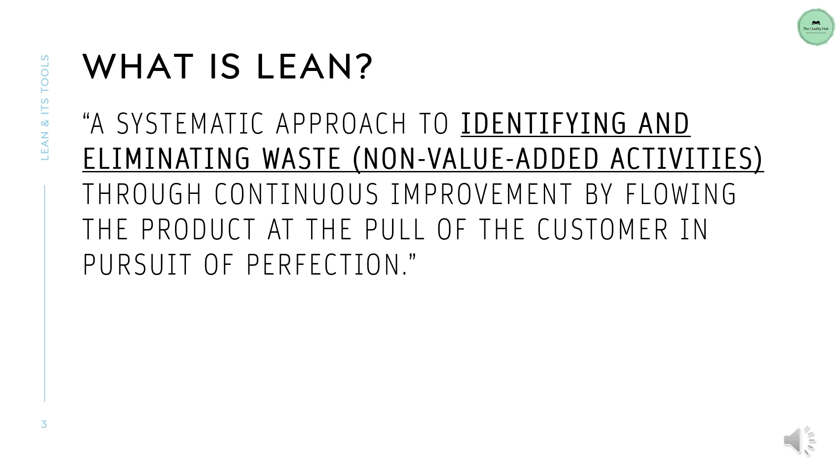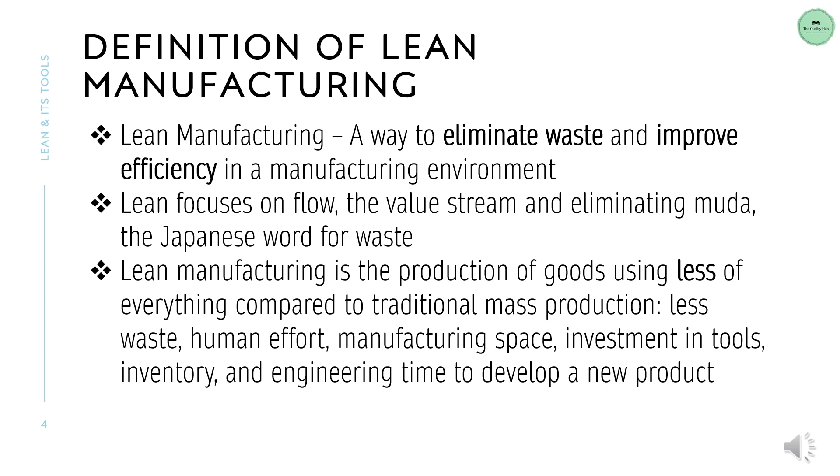Lean manufacturing, a way to eliminate waste and improve efficiency in a manufacturing environment. Lean focuses on flow, the value stream, and eliminating MUDA, the Japanese word for waste. Lean manufacturing is the production of goods using less of everything compared to traditional mass production: less waste, human effort, manufacturing space, investment in tools, inventory, and engineering time to develop a new product.

Lean manufacturing is sometimes called the Toyota Production System, TPS, because Toyota Motor Company's Eiji Toyoda and Taiichi Ohno are given credit for its approach and innovations.

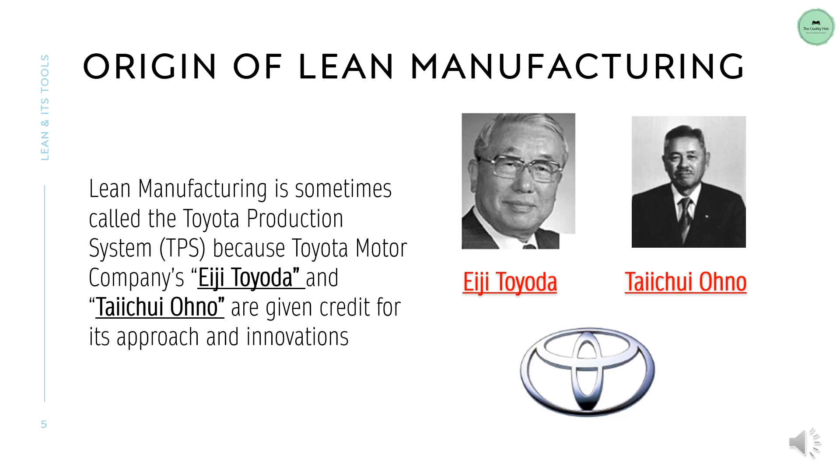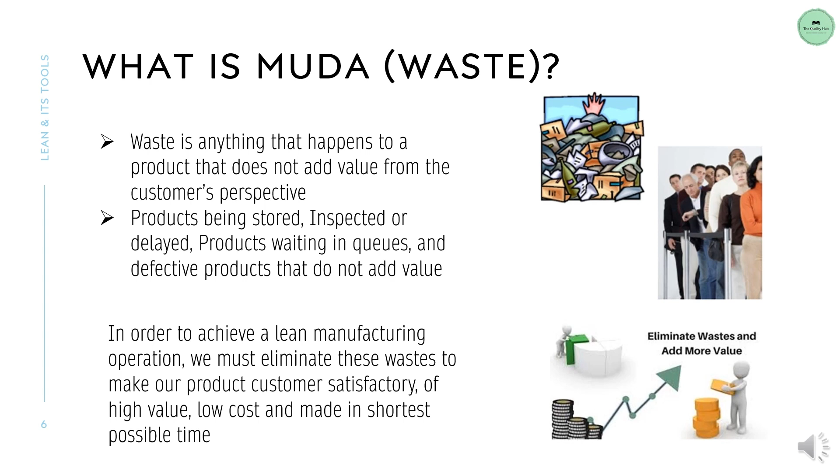Waste is anything that happens to a product that does not add value from the customer's perspective. Products being stored, inspected or delayed, products waiting in queues, and defective products do not add value. In order to achieve a lean manufacturing operation, we must eliminate these wastes to make our product customer satisfactory, of high value, low cost, and made in the shortest possible time.

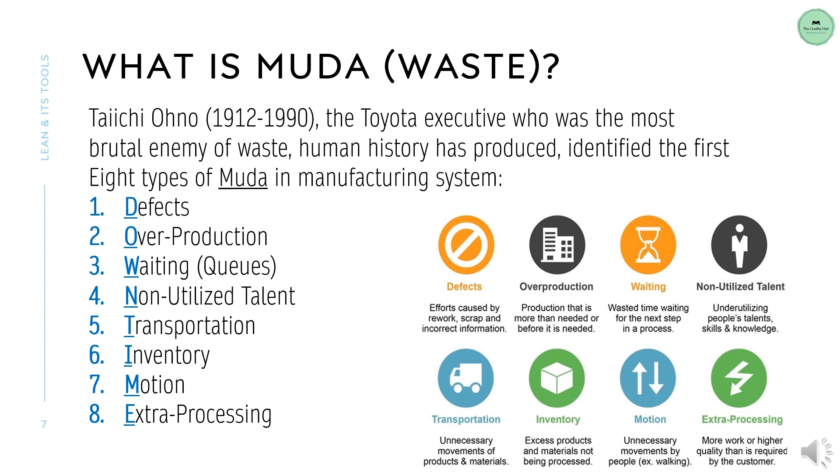Taiichi Ohno, 1912 to 1990, the Toyota executive who was the most brutal enemy of waste human history has produced, identified the first 8 types of MUDA in manufacturing systems: 1. Defects. 2. Overproduction. 3. Waiting, queues. 4. Non-utilized talent. 5. Transportation. 6. Inventory. 7. Motion. 8. Extra processing.

1. Defects, products or services that are out of specification that require resources to correct. 2. Overproduction, producing more than the customer orders or producing early. Inventory of any kind is usually waste. 3. Waiting, idle time, storage, and waiting are wastes. 4. Non-utilized talent, employees that are not effectively engaged in the process.

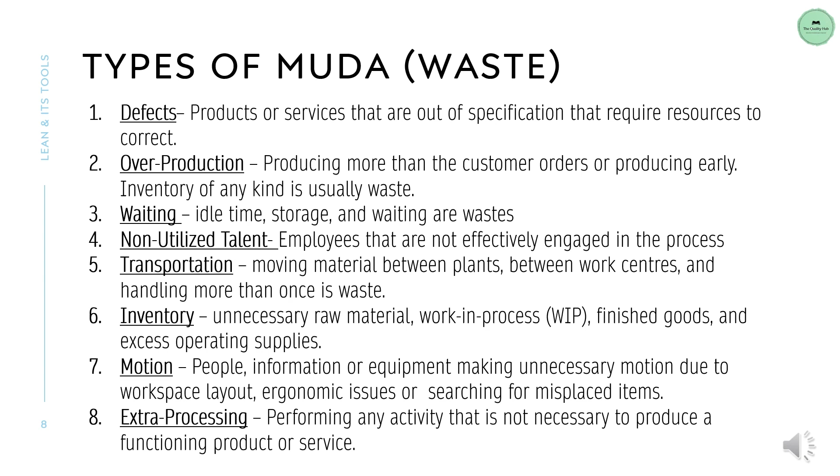5. Transportation, moving material between plants, between work centers, and handling more than once is waste. 6. Inventory, unnecessary raw material, work in process, WIP, finished goods, and excess operating supplies. 7. Motion, people, information or equipment making unnecessary motion due to workspace layout, ergonomic issues or searching for misplaced items. 8. Extra processing, performing any activity that is not necessary to produce a functioning product or service.

Hoshin Kanri is a 7-step process used as part of strategic planning, in which goals are communicated and shared throughout the company, and then put into action. The purpose of Hoshin Planning is to improve communications throughout the company, whilst also reducing the waste created by poor direction or bad management at any level. For this reason, companies that use Hoshin Kanri often follow a think, plan, implement, and review process.

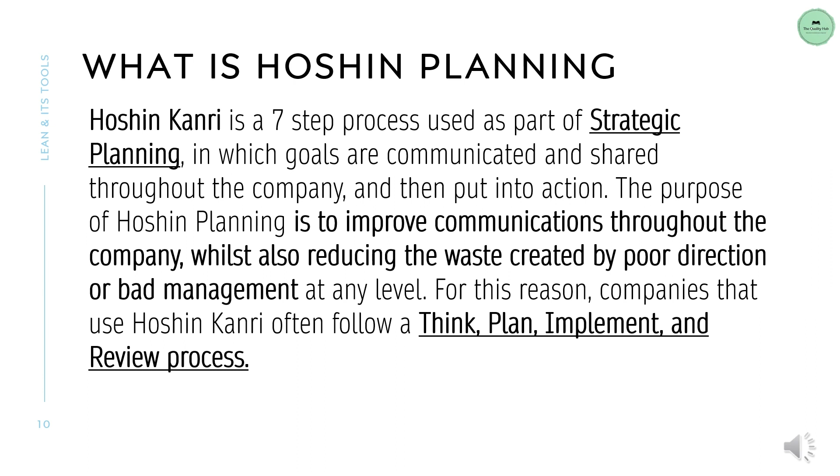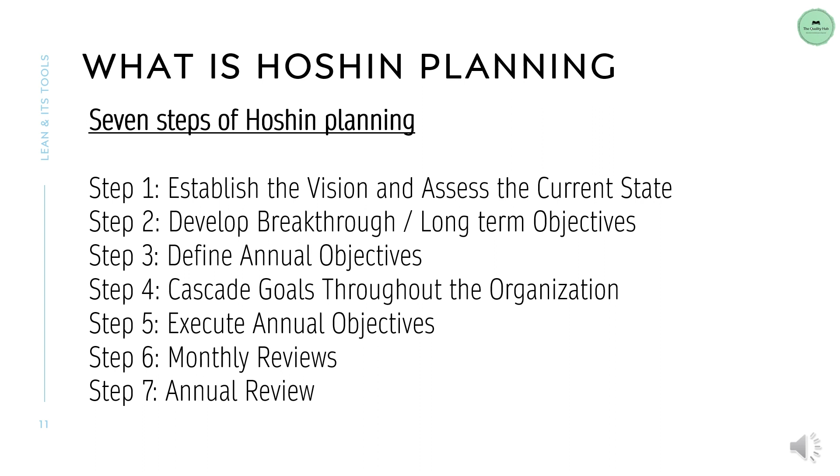Step 1. Establish the vision and assess the current state. Step 2. Develop breakthrough/long-term objectives. Step 3. Define annual objectives. Step 4. Cascade goals throughout the organization.

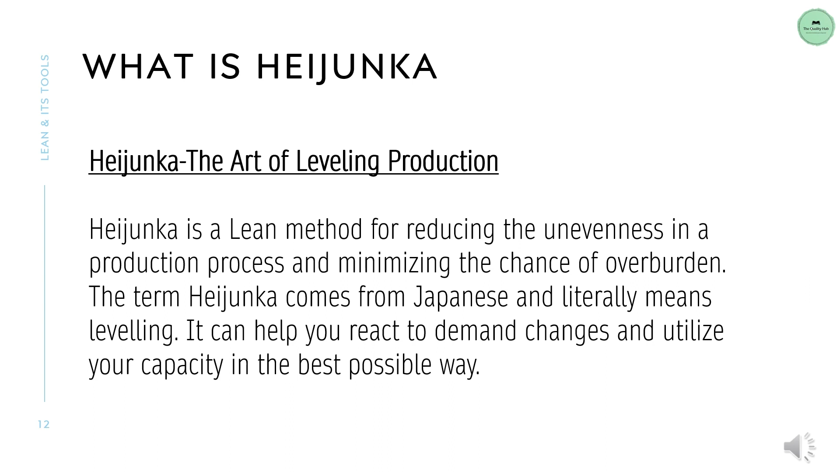HEIJUNKA, the art of leveling production. HEIJUNKA is a lean method for reducing the unevenness in a production process and minimizing the chance of overburden. The term HEIJUNKA comes from Japanese and literally means leveling. It can help you react to demand changes and utilize your capacity in the best possible way.

JIDOKA is a lean method that is widely adopted in manufacturing and product development. Also known as autonomation, it is a simple way of protecting your company from delivering products of low quality or defects to your customers while trying to keep up your takt time. The JIDOKA system consists of certain common autonomation systems like Poka-yoke and the ANDON System.

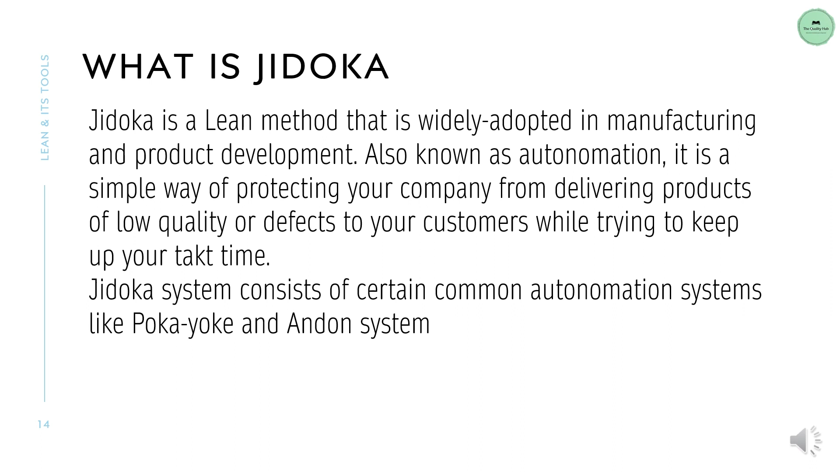The ANDON System serves as a warning system to signal and identify problems in the process. A visual and/or audible communication system that notifies everyone of abnormalities in a process when support or attention is needed. This can be triggered automatically or manually by a machine or person.

It could be a cord that is manually pulled, often seen on an assembly line. Light, red, yellow and green colors. Flag, also red, yellow and green, that is placed in a holder or flipped to signal a problem.

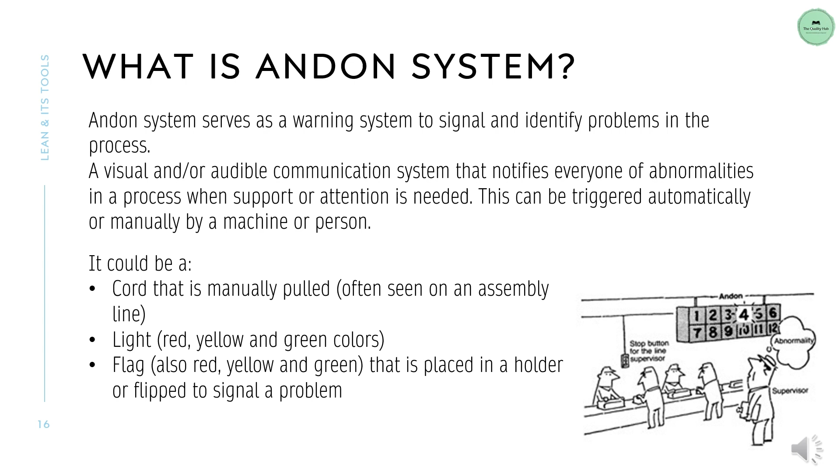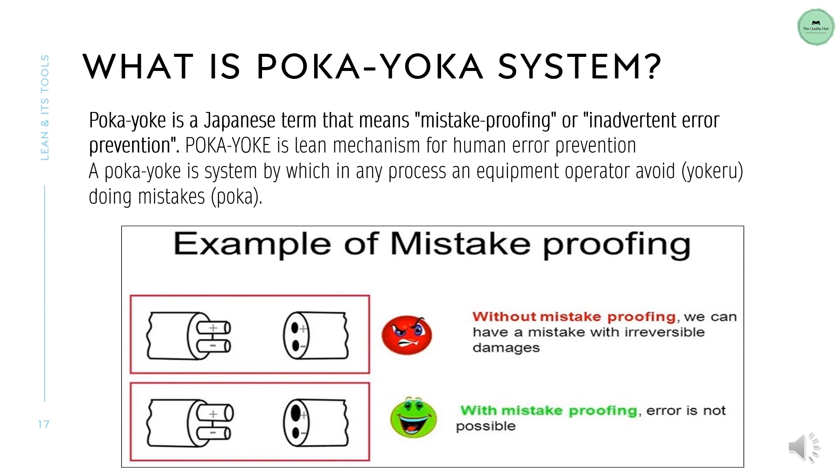Poka-yoke is a Japanese term that means mistake proofing or inadvertent error prevention. Poka-yoke is a lean mechanism for human error prevention. A poka-yoke is a system by which, in any process, an equipment operator avoids (yokeru) making mistakes (poka).

1. Value: specify and define value of the product from the customer's point of view. 2. Value stream: identify all the steps in the value stream for each product family, eliminating whenever possible those steps that do not create value. 3. Flow: make the value-creating steps occur in tight sequence so the product will flow smoothly toward the customer. 4. Pull: make only what is needed by the customer, short-term response to customer rate of demand. 5. Perfection: strive for perfection by continuous improvement.

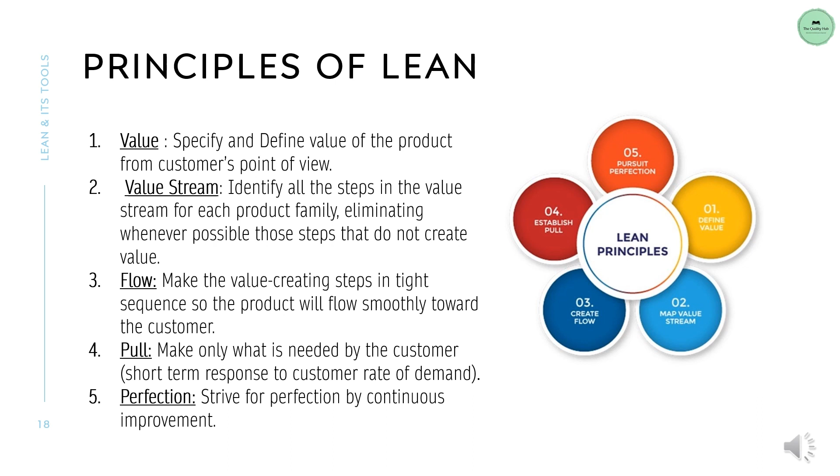5S. Single-minute exchange of dies, SMED. JIT, just-in-time. Kanban. Cellular manufacturing. Standardized work. Total productive maintenance.

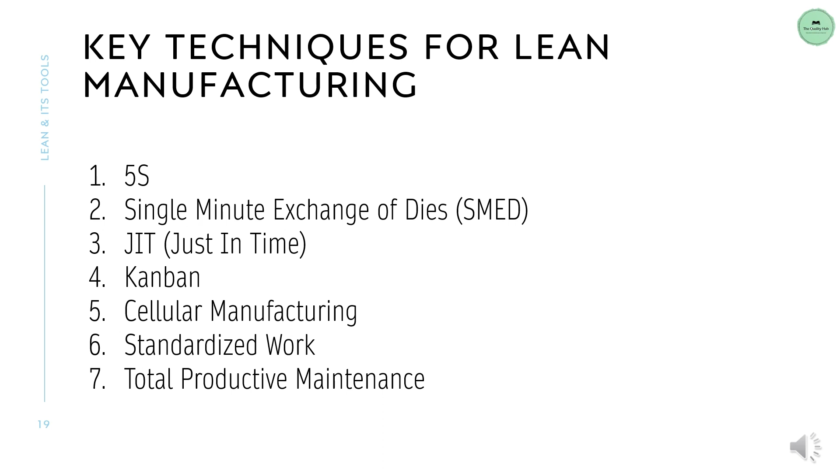5S stands for Sort, Seiri: to separate needed tools, parts, and instructions from unneeded materials and to remove the unneeded ones. Set in order, Seiton: to neatly arrange and identify parts and tools for ease of use. Shine, Seiso: to conduct a cleanup campaign. Standardize, Seiketsu: to conduct Seiri, Seiton, and Seiso daily to maintain a workplace in perfect condition. Sustain/self-discipline, Shitsuke: to form the habit of always following the first 4 S's. In some quarters, 5S has become 6S, the sixth element being safety.

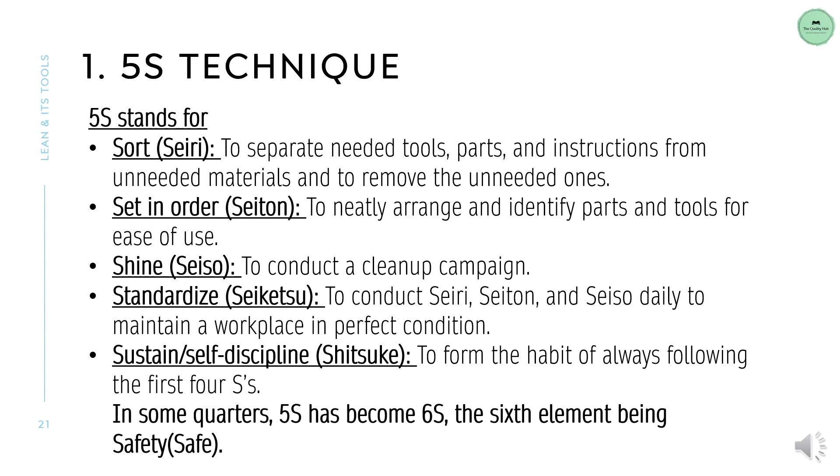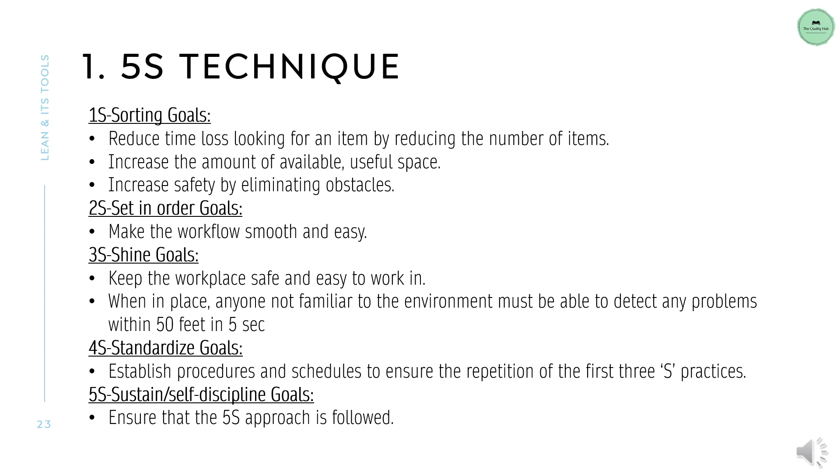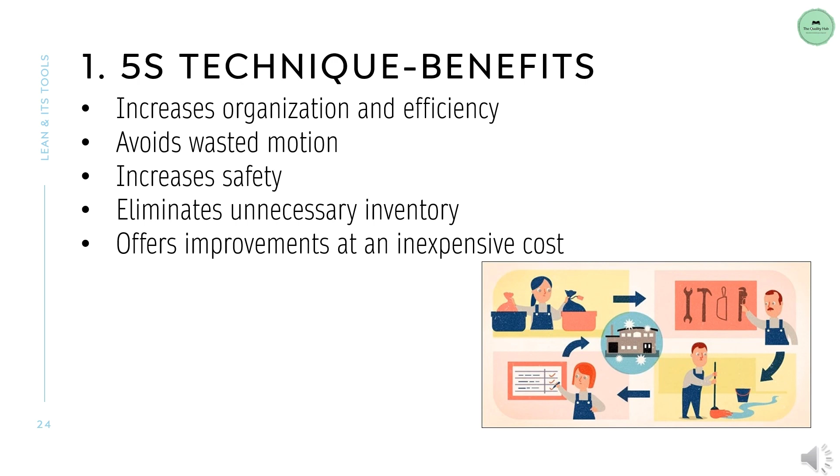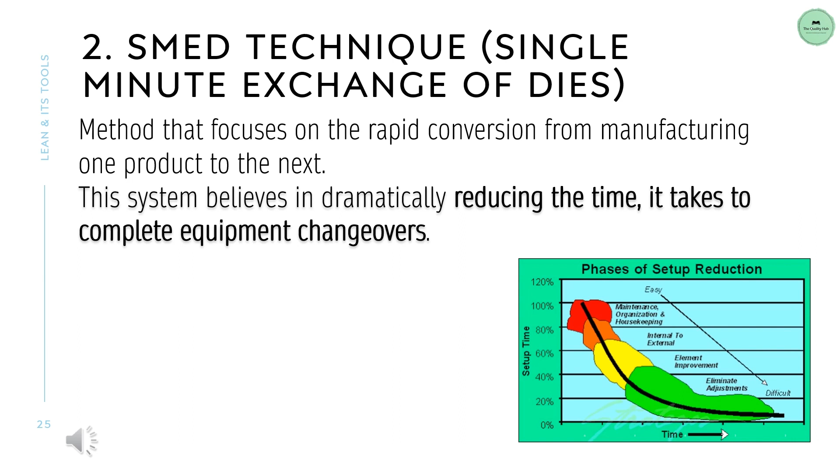Increases organization and efficiency. Avoids wasted motion. Increases safety. Eliminates unnecessary inventory. Offers improvements at an inexpensive cost. SMED is a method that focuses on the rapid conversion from manufacturing one product to the next. This system believes in dramatically reducing the time it takes to complete equipment changeovers.

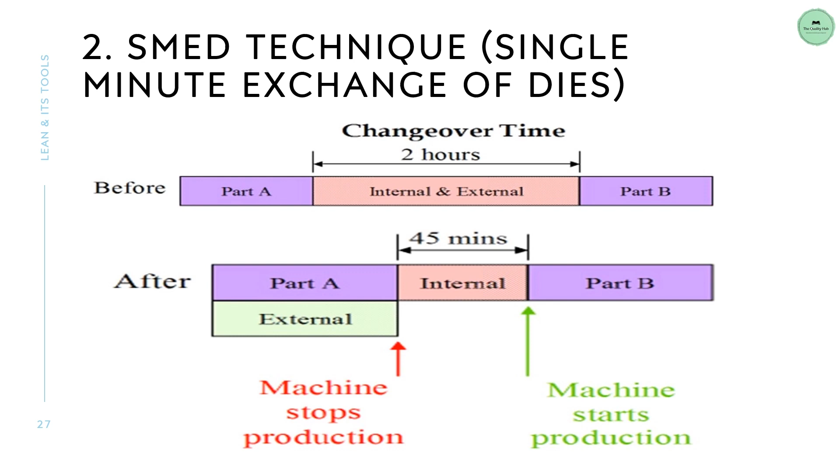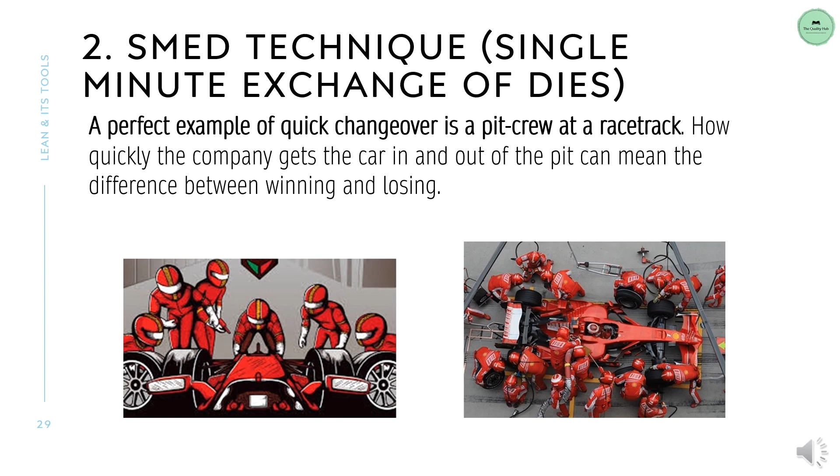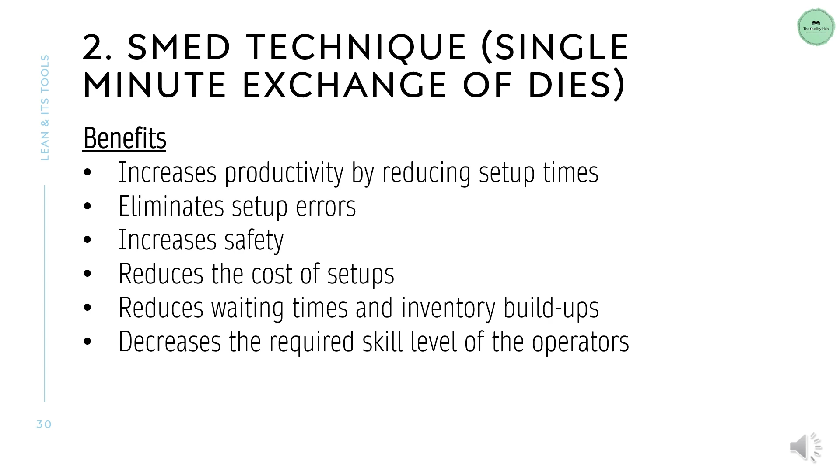A perfect example of quick changeover is a pit crew at a racetrack. How quickly the crew gets the car in and out of the pit can mean the difference between winning and losing. Benefits: increases productivity by reducing setup times. Eliminates setup errors. Increases safety. Reduces the cost of setups. Reduces waiting times and inventory buildups. Decreases the required skill level of the operators.

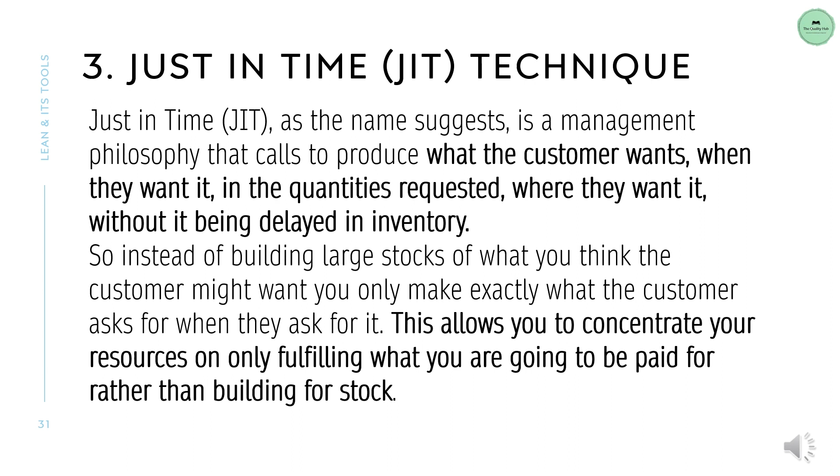Just-in-time, JIT, as the name suggests, is a management philosophy that calls to produce what the customer wants, when they want it, in the quantities requested, where they want it, without it being delayed in inventory. So, instead of building large stocks of what you think the customer might want, you only make exactly what the customer asks for when they ask for it. This allows you to concentrate your resources on only fulfilling what you are going to be paid for rather than building for stock.

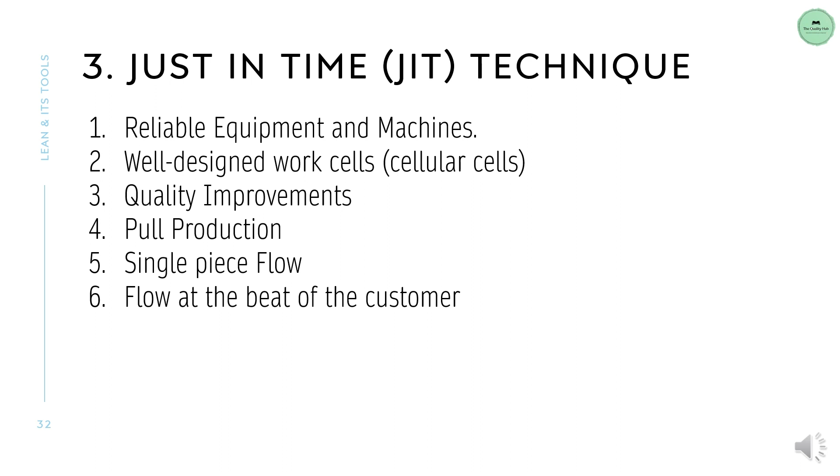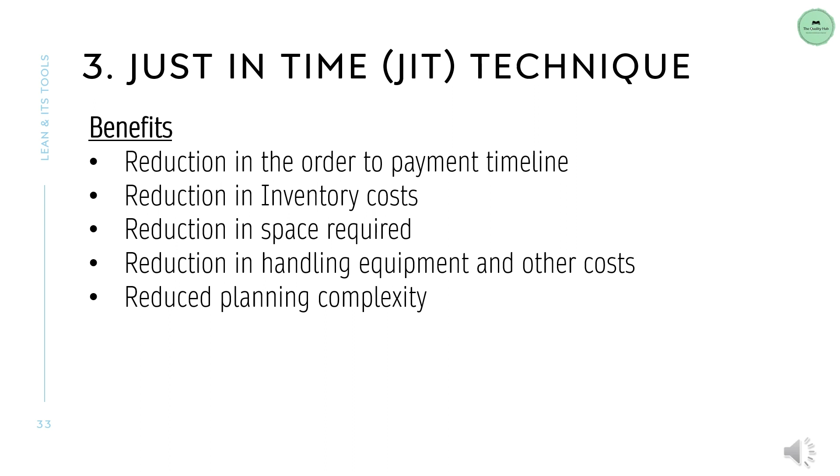Reliable equipment and machines. Well-designed work cells. Quality improvements. Pull production. Single-piece flow. Flow at the beat of the customer. Benefits: reduction in the order-to-payment timeline. Reduction in inventory costs. Reduction in space required. Reduction in handling equipment and other costs. Reduced planning complexity.

Kanban is a system that uses replenishment signals to simplify inventory management. Signals, usually cards, hold product details: what to make, when to make it, how much to make, and where to send it. Cards stay attached to a bin that holds the product. When a bin is empty, it is returned to the start of the assembly line for replenishment. Full bins are returned to the customer, and the cycle continues.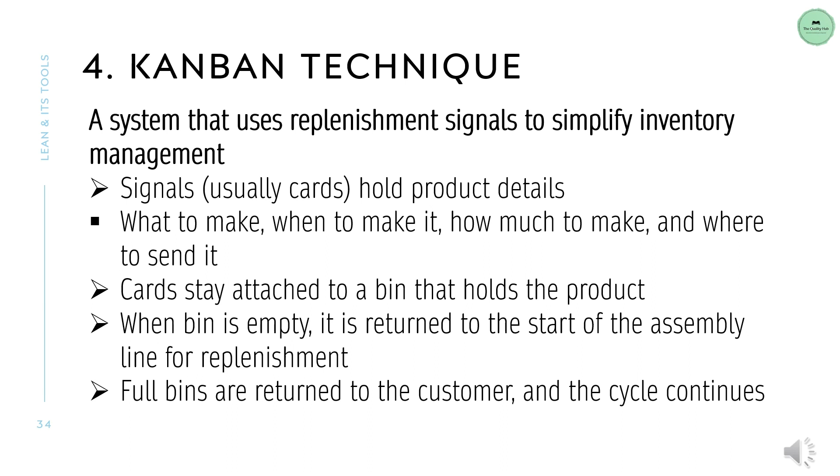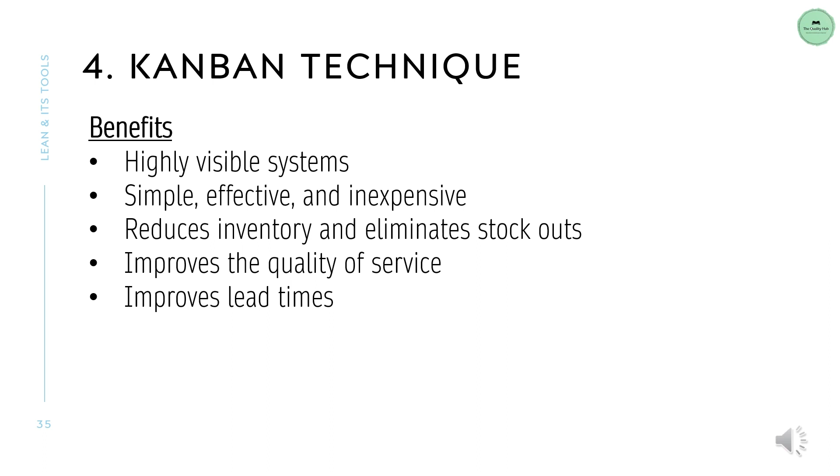Benefits: highly visible systems. Simple, effective, and inexpensive. Reduces inventory and eliminates stockouts. Improves the quality of service. Improves lead times.

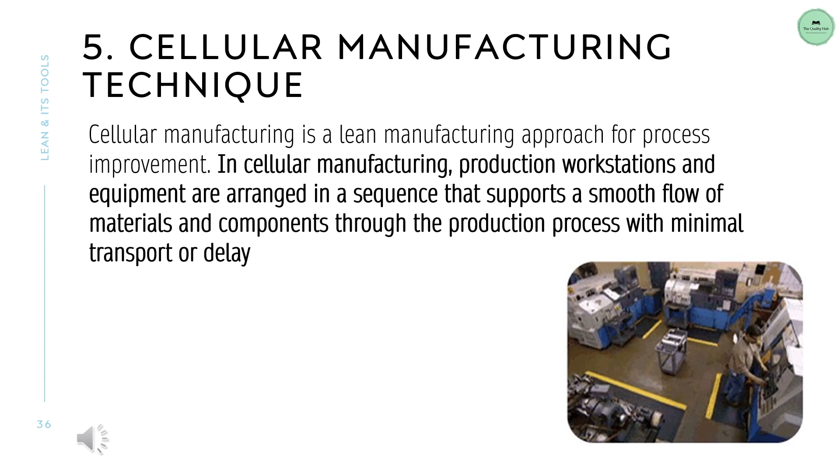Cellular manufacturing is a lean manufacturing approach for process improvement. In cellular manufacturing, production workstations and equipment are arranged in a sequence that supports a smooth flow of materials and components through the production process with minimal transport or delay. Benefits: simplifies material flow and management. Reduces interdepartmental travel. Reduces throughput time. Reduces lot sizes. Simplifies scheduling.

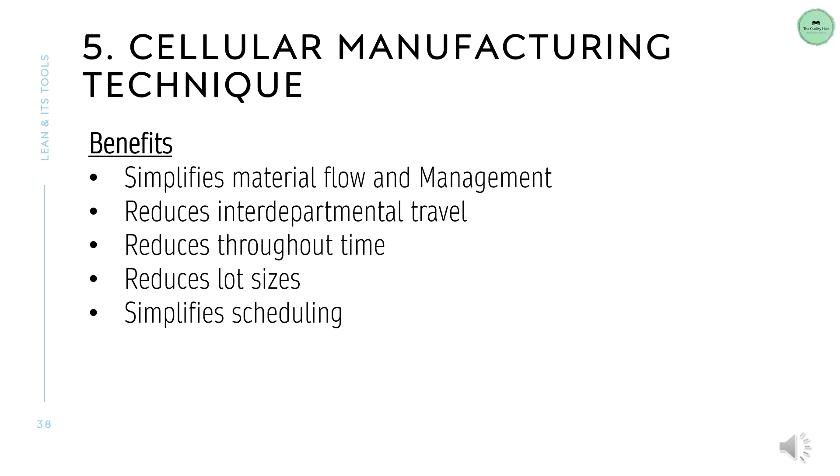Standardized work is a simple concept. It refers to the process of documenting methods, processes, materials, tools, processing times, and more. At its core, it is about ensuring your operations run as smoothly as possible and your process improvement strategy is constantly evolving and being adopted by your employees.

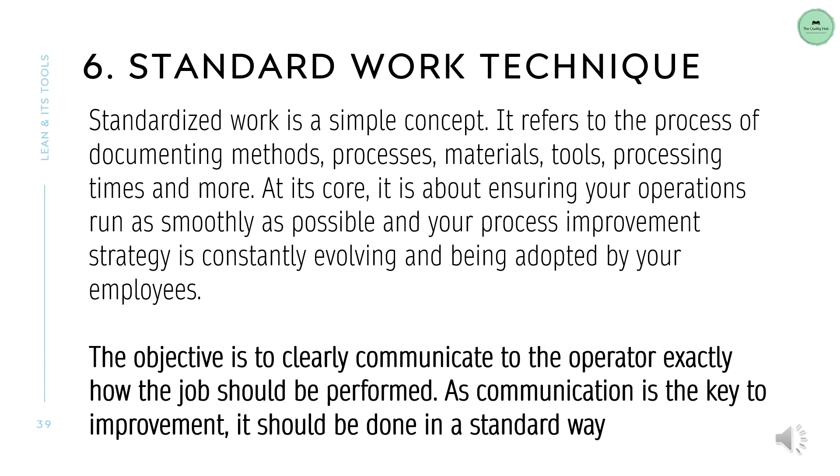The objective is to clearly communicate to the operator exactly how the job should be performed. As communication is the key to improvement, it should be done in a standard way. Benefits: best practices are followed. Process improvement never ends. Reduces waste. Improves scaling efforts. Makes abnormalities more visible. Less time spent on guesswork.

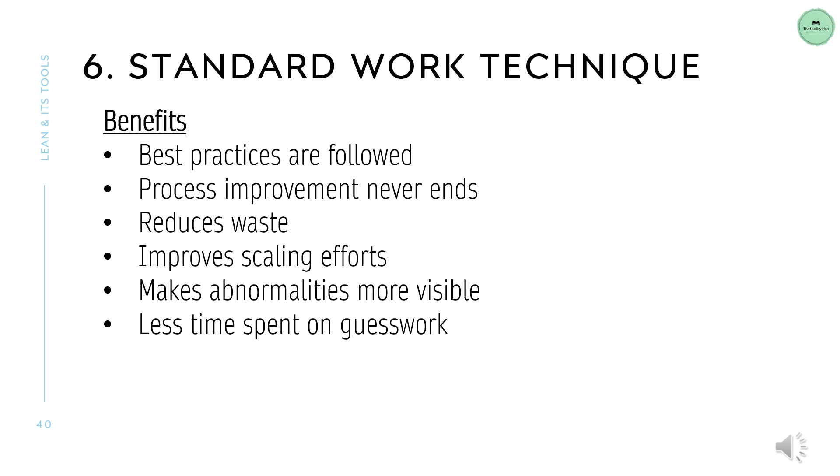TPM, Total Productive Maintenance, is a holistic approach to equipment maintenance that strives to achieve perfect production. TPM emphasizes proactive and preventative maintenance to maximize the operational efficiency of equipment. In the right environment, this can be very effective in improving productivity, increasing uptime, reducing cycle times, and eliminating defects.

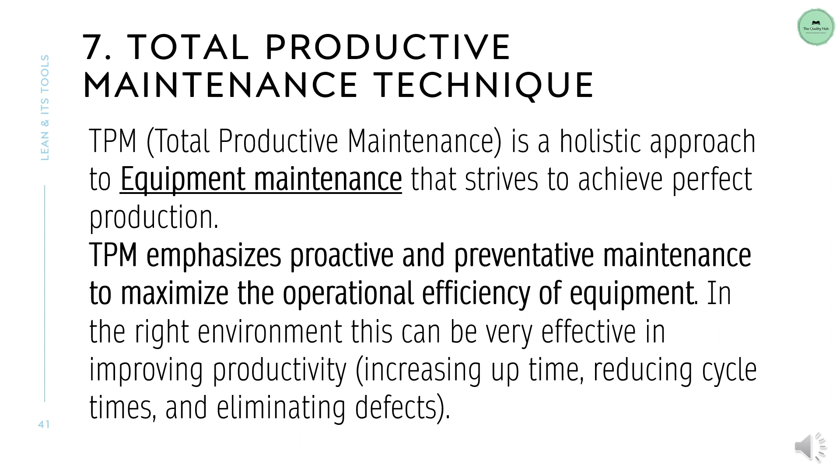Benefits: no major breakdowns. No unplanned downtime. No small stops or slow running. No defects. In addition, it values a safe working environment, no accidents.

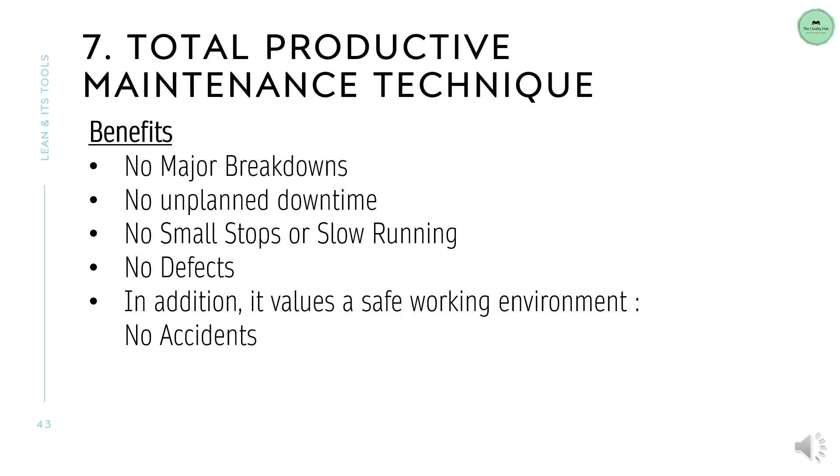1. Greater productivity. Applying a lean methodology involves eliminating tasks that add no value to the customer, referred to as waste. Removing these from processes drives productivity as it means the workforce only engages in activities that benefit the customer. 2. Smoother operations. Once non-value-adding activities, waste, have been removed from processes, the focus is on making the remaining value-adding steps flow smoothly with no interruptions, delays, or bottlenecks.

3. Greater flexibility and responsiveness. With more streamlined processes, you will be better able to meet demands at the pull of the customer. 4. Eliminates defects. Much of the activity involved in a lean methodology is geared towards eliminating defects so that products are made right first time, every time. 5. Improved product quality. Lean tools like error proofing and ANDON strengthen the process and prevent recurrence of the problem. As a result, the quality of your product is improved.

6. Reduce lead time. Applying a lean methodology and removing non-value-adding steps, you'll reduce lead times and be better able to meet demands. 7. Increased customer satisfaction. This is what lean is all about, maintaining happy customers. By removing waste and streamlining processes, you can deliver exactly what the customer wants, when they want it.

8. Improved staff morale. Lean creates an environment where they can raise ideas for improvements and contribute towards better ways of working. Engaging them in this process results in increased staff satisfaction and retention. Staff feel more motivated, more confident of their role in the bigger picture, and more fulfilled. 9. Safer working environment. Employees benefit from a safer working environment where risks have been reduced via 5S and TPM, leading to a safer environment.

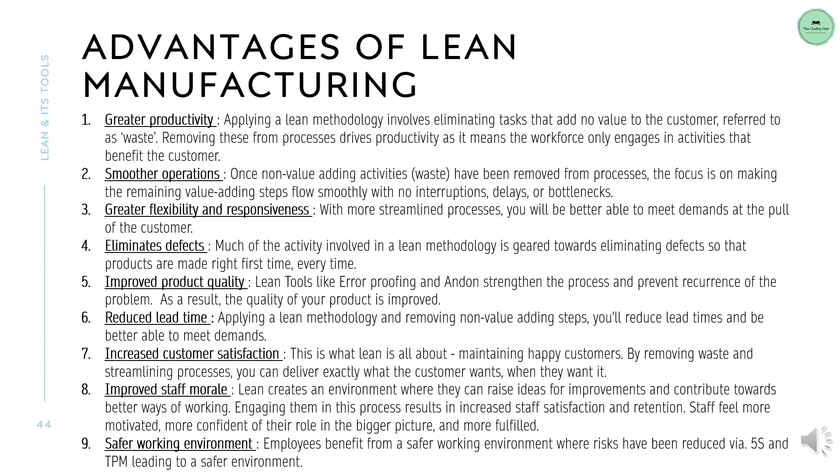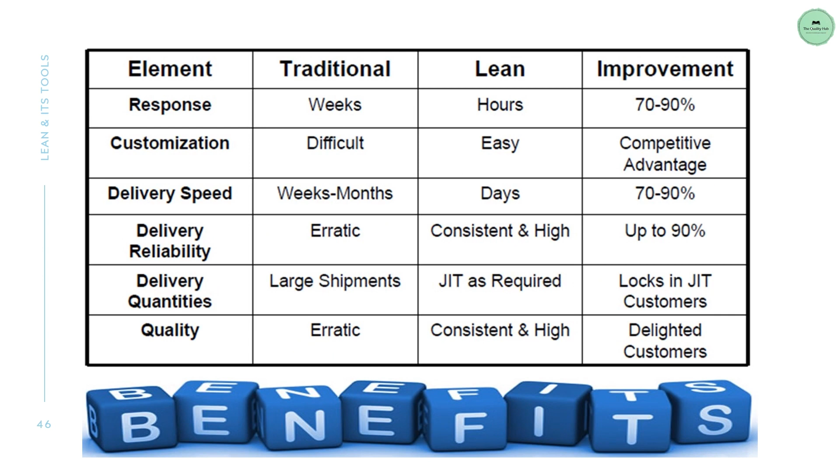As we all came across the basics of lean manufacturing, its tools and their benefits, we will further investigate one of the case studies we came across during our research. This case study is related to one of India's leading footwear manufacturers. Even though being the market leader in footwear manufacturing, they were facing certain major problems in their plant as follows: lower productivity, less space, untidy workspace, mix-up of materials, delay in customer delivery.

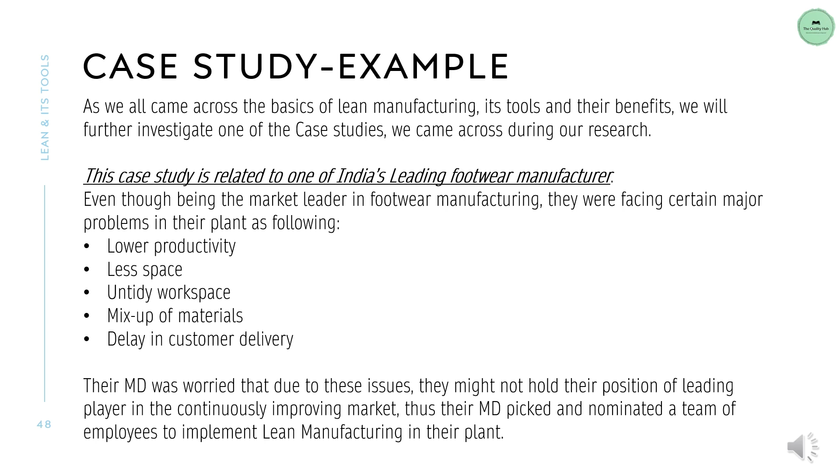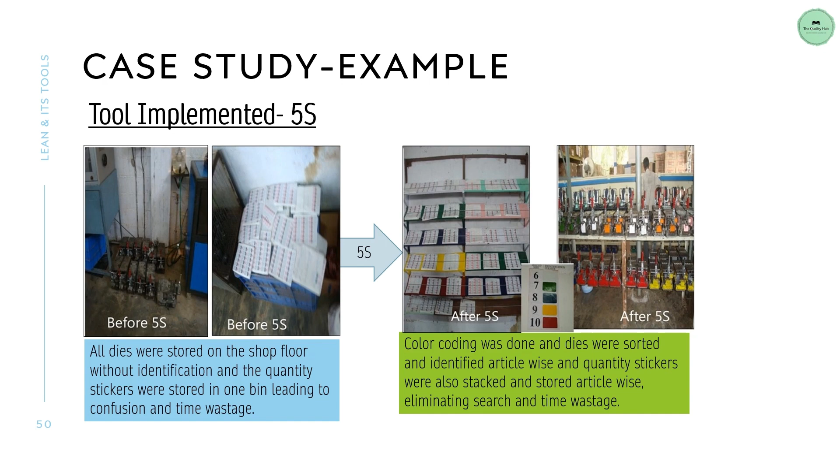Their MD was worried that due to these issues, they might not hold their position of leading player in the continuously improving market. Thus their MD picked and nominated a team of employees to implement lean manufacturing in their plant. All the lean activities were implemented successfully and the following benefits were observed in the company. Production average was 900 pairs/day, but after lean implementation it increased to 1,200 pairs/day.

Finishing activity was utilizing more time during delivery, but after lean all items were processed till final packing, leading to saving of time during delivery. Shop floor was well maintained and organized. Machine health condition was well maintained and total downtime decreased. Employees' morale was increased as there were fewer problems and a well-organized environment to work in. Thus, lean manufacturing helped the company tackle their various problems and improve their overall quality, productivity and employees' morale to keep striving for more improvement in the company.

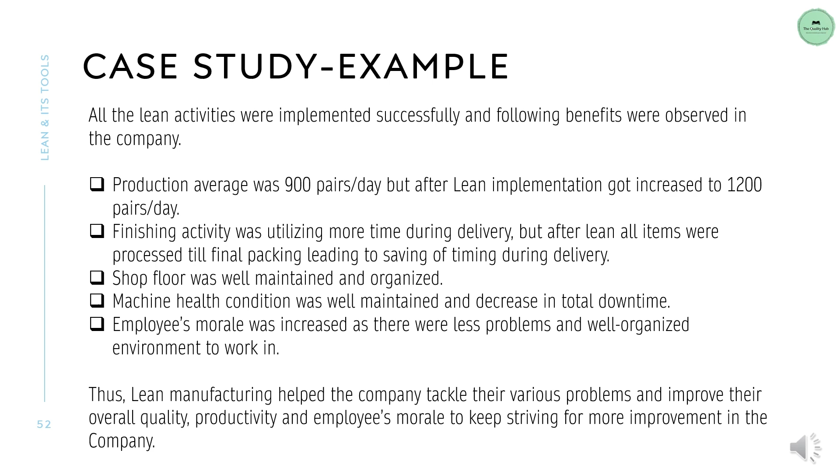Applying lean manufacturing improves the flexibility of the organization and the quality of operations, reduces the goods in stock, improves the functioning of the process, eliminating activities that do not add value. It is better utilization of human resources, improving the organization of work and employee satisfaction, and ultimately, the most important, increases customer satisfaction. Thus, the purpose of lean manufacturing is to lead the organization into becoming the world's leading organization in terms of quality, through a constant effort of waste reduction and continuous improvement.